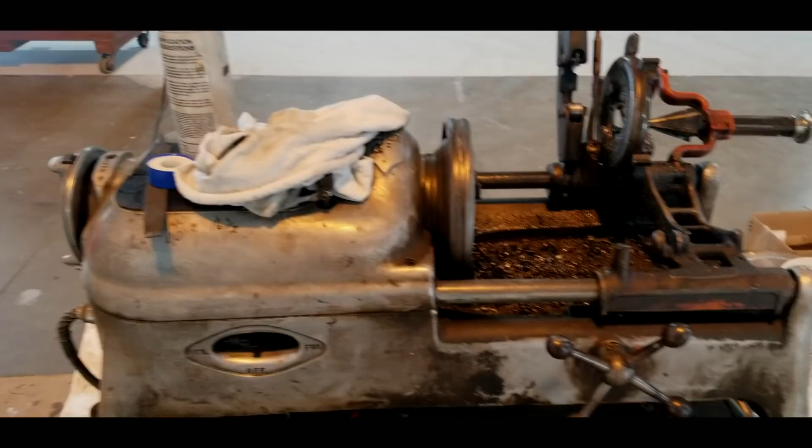Today we're doing some industrial airlines for a manufacturing plant. We're just getting set up here. Got my old Ridgid 535 out, and we burned through an awful lot of material. I'm going to walk you around and show you the airlines, what we did, and how we did it.

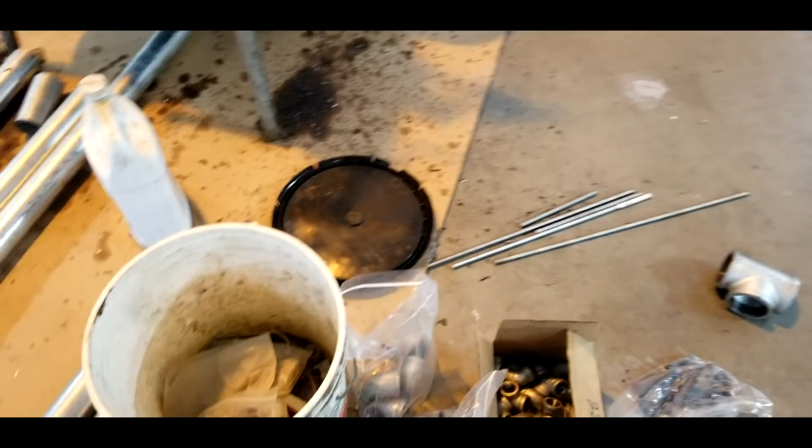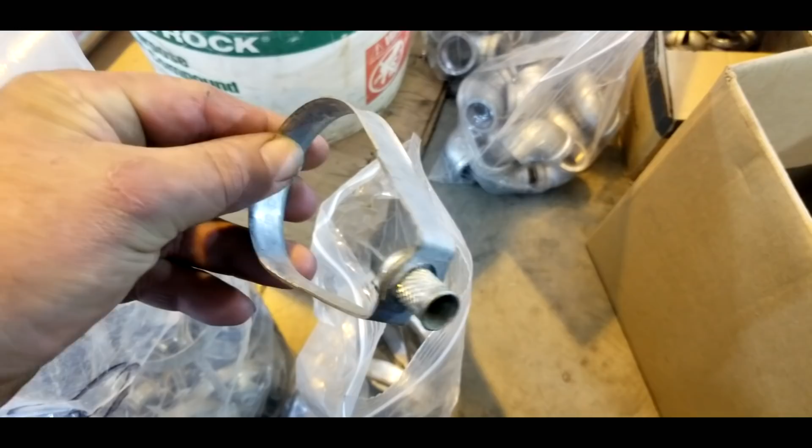Let's talk about the hangers, how we're hanging the pipe. We're hanging it on all thread, 3/8 all thread, and we're using what they call a band hanger down here in this bag. It's just called a band or a loop hanger. It's got a little threaded plug in there that threads into the all thread.

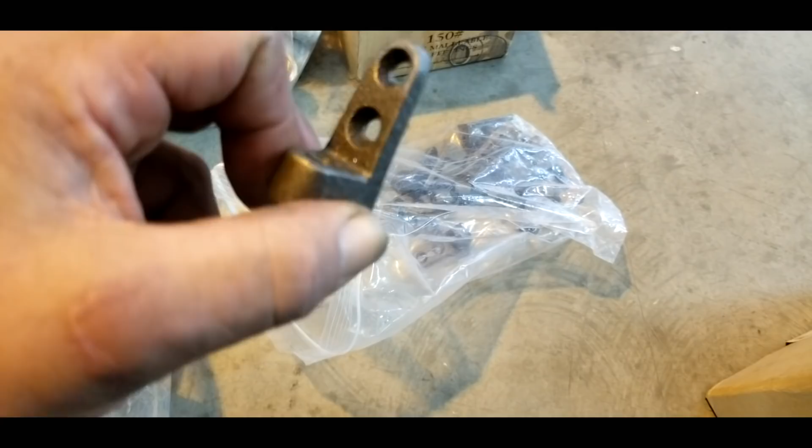Then we're using two attachment methods on the building. We've got some little cast iron angle clips that we screw into the purlins, and that's threaded for the all thread, so that's one way we do it. And that's a threaded lag that you can screw right into the purlin.

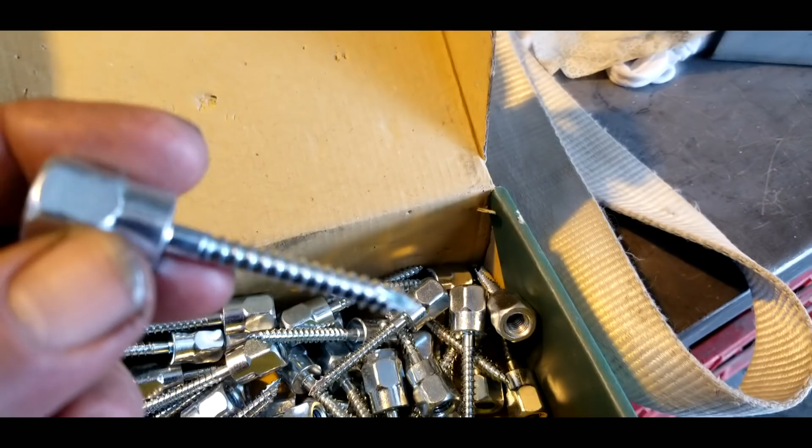It's got a 5/8 hex on it, and then it's got a 3/8 plug here in the back. You screw this up into the purlin and then put your all thread right in there. So that's how those are, our two different attachment methods.

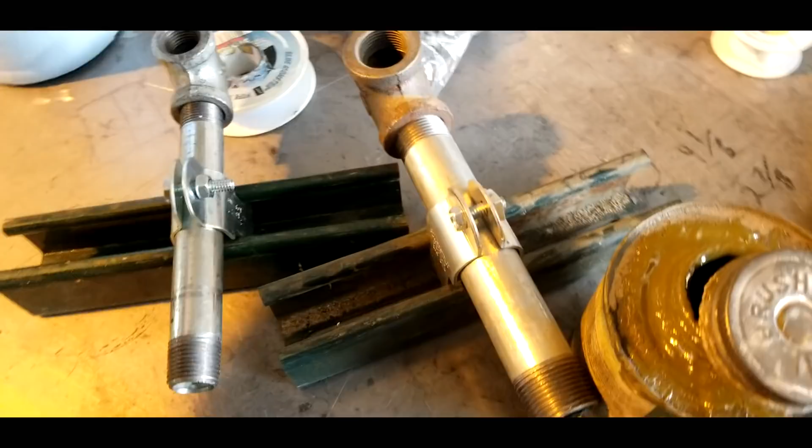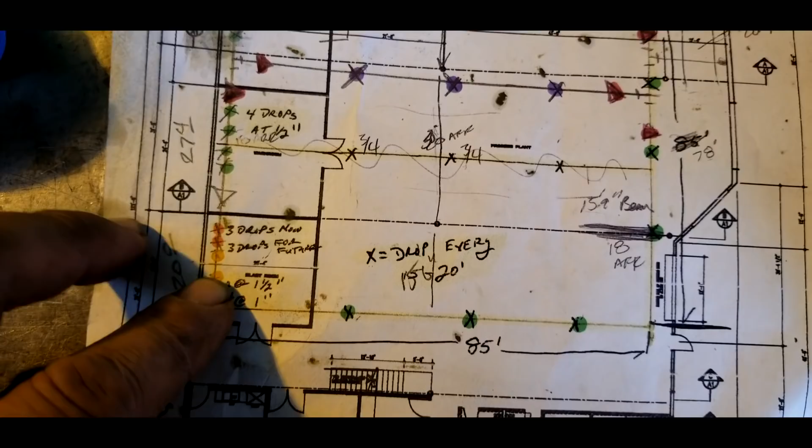Everywhere you see a pink dot is 1.5 inches, so there's more halves. The purples are 3/4, so we got some 3/4 in there. And everywhere you see one of these triangles are isolation valves for the main system.

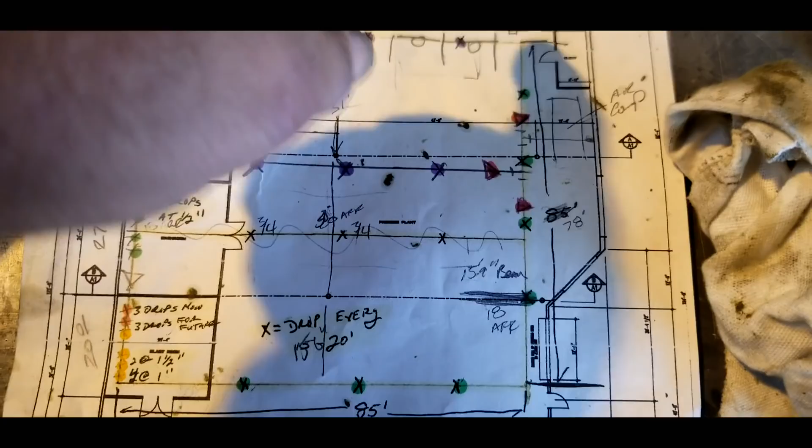The system is a loop. It does a big loop, plus it has a crossover in the middle. So anywhere over here in this crossover, we got valve, valve, valve, so we can isolate any section of the building.

Valve, valve, valve, and we can isolate any section of the building. So we can cut off this side of the loop, this side of the loop, or the center section of the loop, and work on it.

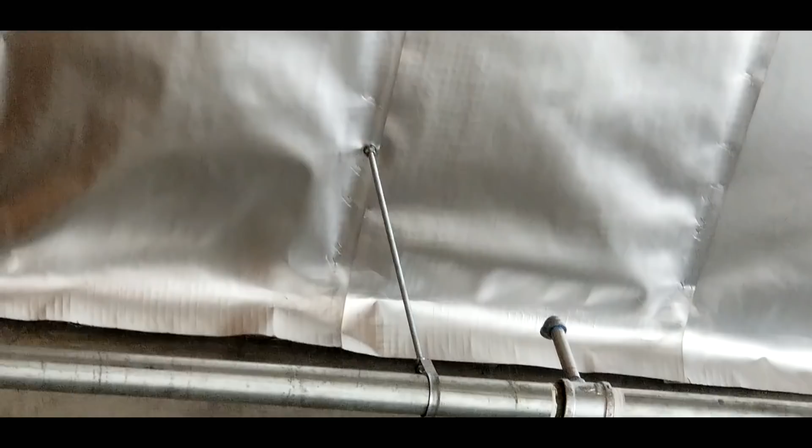So let's go take a look at the rest of the building. Okay, camera focused, and up there you'll see our attachment methods. I can actually zoom in on that a little bit and let you see that's a Sammy going into the bottom of a purlin with a piece of threaded rod coming down to a band hanger.

And that is a Schedule 40, 2-inch galvanized pipe. And if you'll notice, all my T's are facing up.

And I'll walk this line here. This is a paint mixing room that's going in underneath here. There's one of the big isolation valves, but we got a paint mixing room going in here.

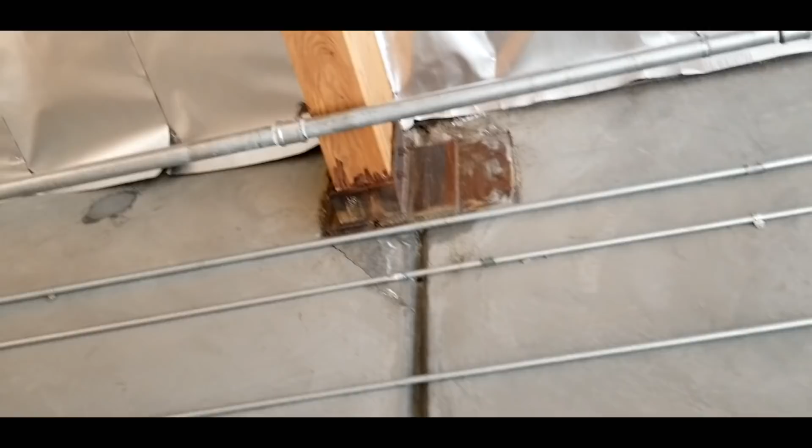And see, we just barely made it underneath that purlin there. And see, every one of these drops, I'm pointing them up.

And we're going to give you an overview of the system here in a little while. There's another isolation valve, more drops. And all these drops are going back to the walls.

I'm going to bring you back and show you what it looks like when we're all finished up. But all those air drops go over to the wall on Unistrut, and they're going to come down the wall, and there'll be a ball valve down low.

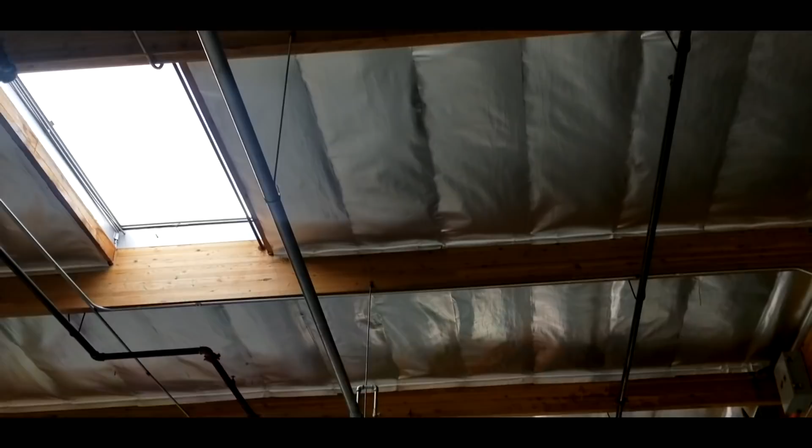All right, so we hook a turn here, and see, there's just a general purpose drop. We've got a valve already in, but we got a little gooseneck on each one, a 6-inch nipple facing up. Same thing there.

And we put an air outlet at every 21 feet, because that's what our pipe comes in, unless they specify any different.

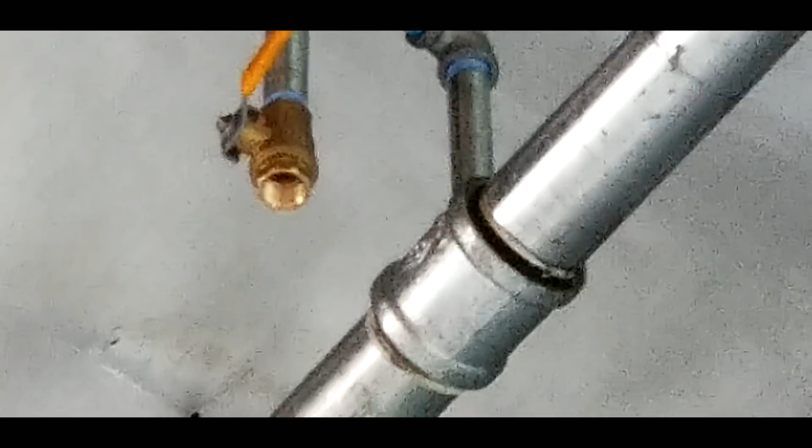There's another air drop there and another isolation valve. I'll zoom in real quick. So you see, we face all our T's up. This allows dirt and things like that to land in the main line, and they can't get out to the air drop if there's any debris in there.

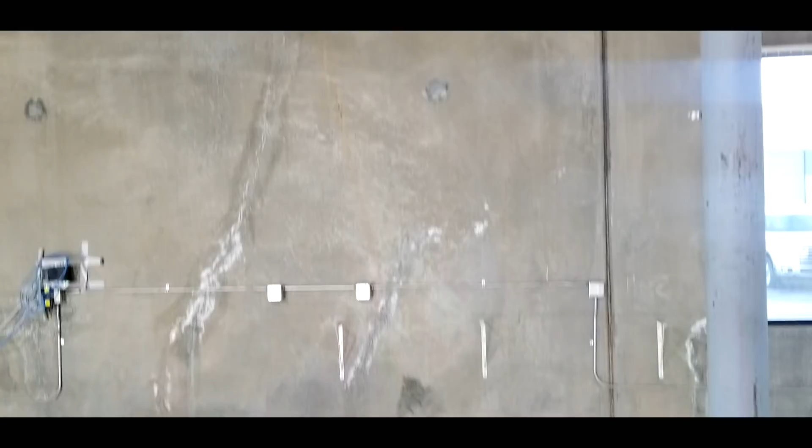Now, we've got one drop facing down. See right there? That's going to go over to this wall. And this is the location of the air compressors, so we're going to have an air compressor and a receiver tank over there in this area.

And we'll have a riser going up that wall, and then we're going to be coming across and feeding that one T that's facing down.

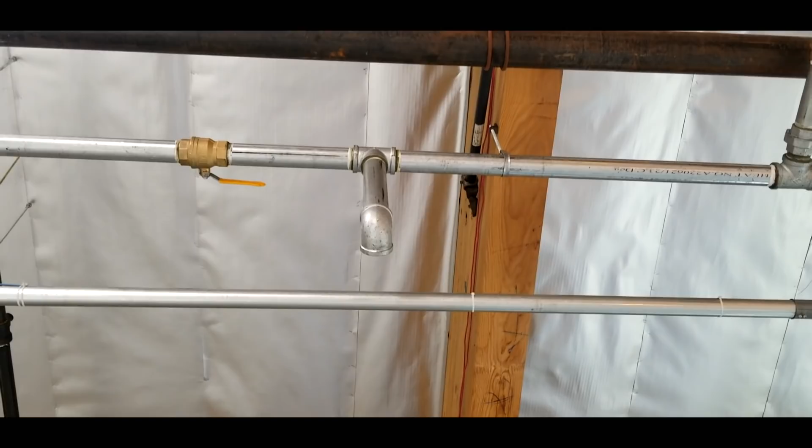And the entire system is pitched, and I'm going to do an overview of the whole thing here in a little bit. There's another isolation valve, and there's another isolation valve and another drop up there.

And this building was a mess when we came here. They got pipes running diagonally through the building, and then look at that mess over there. That looks horrible. This is a new tenant moving in here, but the old tenant just hacked this place. Nothing's straight, everything's crooked around here.

And then we've got some more drops down this wall. Same thing, T's facing up. But I'm going to back up here real quick and try to show you the whole building and explain what's happening here.

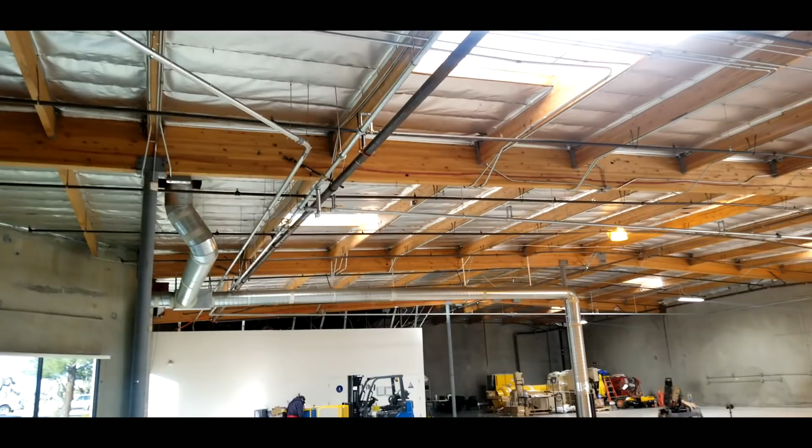Now what's happening is right here is where we're dropping in and going off to the wall for our air compressors. We've pitched our entire system. All the way along that back wall, that's running level. This line running down this wall, the line running down the center, and that far one way over there, those all pitch down as coming towards me right now. It's not much, we only pitched it 3 inches over about 85 feet, but it does drain this way.

So when we drain the house lines, everything comes back this direction, and we put a drip leg in to catch all the junk. It could be water, it could be oil if the compressor fails, it could be rust. It could be a number of things that can get into an airline. You'd be surprised what gets in there. But we just thought we'd show you our methods on how we install airlines and double loop systems.

We've got a very high demand way back here in this corner. There's sandblasting cabinets and things like that over there. So with the loop system and a crossover, we've got multiple paths back to the sandblast corner. And over here we've got a paint department where they'll be spraying with spray guns. And back in the paint mixing room, they're doing paint dispensing and pumping, so they'll have Graco pumps and lots of spraying going on. They need clean, dry air everywhere, sandblasting too. All right, let's go take a look at their air compressor.

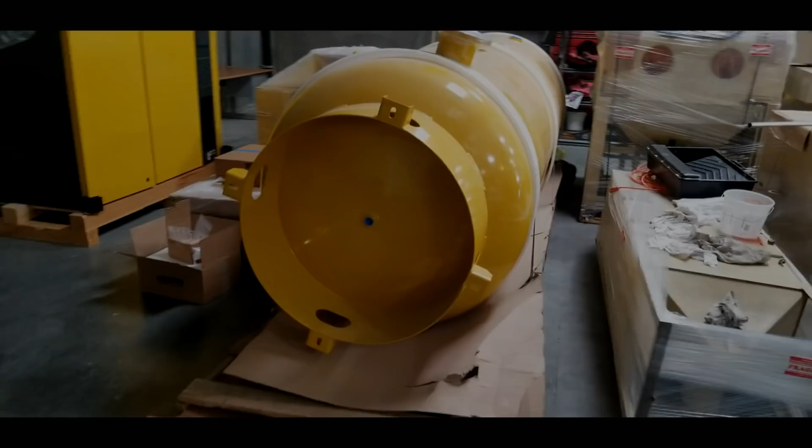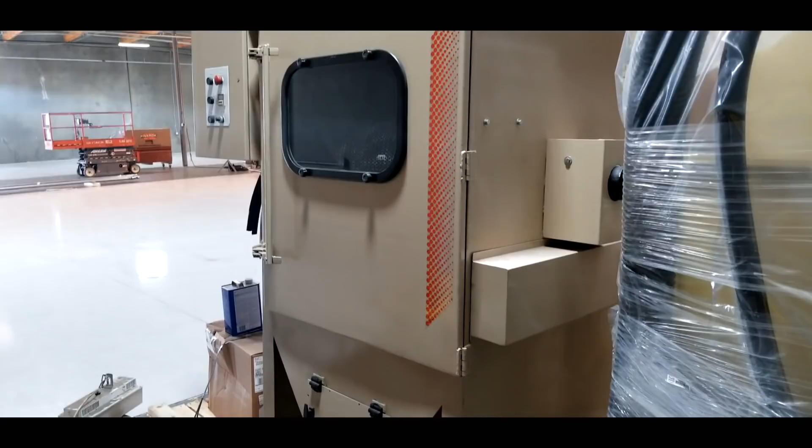So this thing's a monster. This is their receiver tank. It's laying down right now, but this is a vertical tank, and it's all from Kaeser. Nice stuff. That's the top of it. She's a big one. There's your sandblast cabinet, there's a blast cabinet, dust collector and hopper, elevator, blast pot. Nice little blast pot right there. And then their compressor, they got a really nice one.

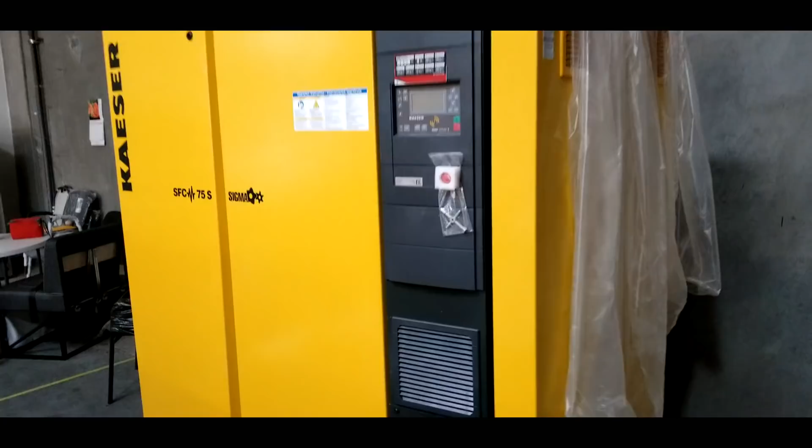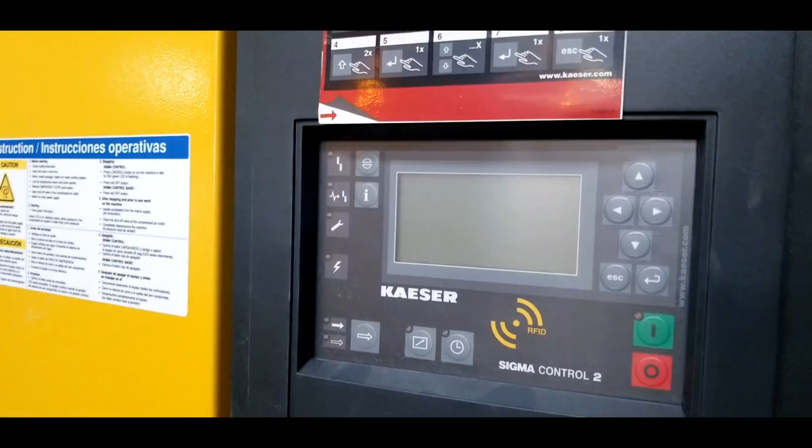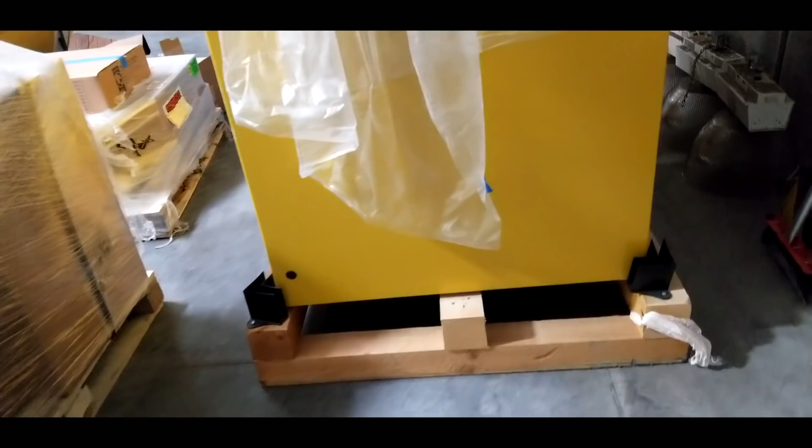They got the SFC 75. So this is a monster, and it's quiet — 68 decibels, if you can believe that, for this compressor. Nice touchscreen control panel, or not touchscreen, but a membrane pad. Nice, beautiful unit. And this has got the built-in refrigerated air dryer. There's one of the after coolers right here, a big radiator. So what a beautiful machine.

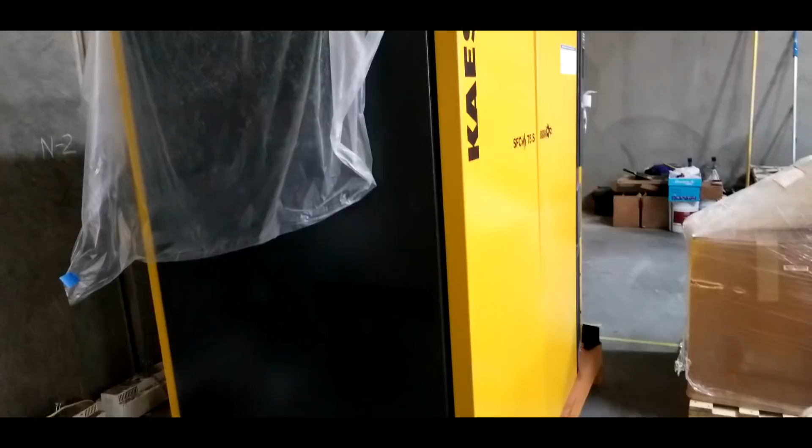Anyways, we'll get some video of this after it's installed. I'll let you guys see what this looks like after this is put in, and after our airdrops are put in, we'll do another video and show you what everything looks like installed. So I just thought I'd show you, this is day 3 for us. We've already got all those lines put in the building. But we'll bring you back after another couple days after we've got some drops in, and hopefully the compressor stuff's put in, and we can take a look at some of that too.

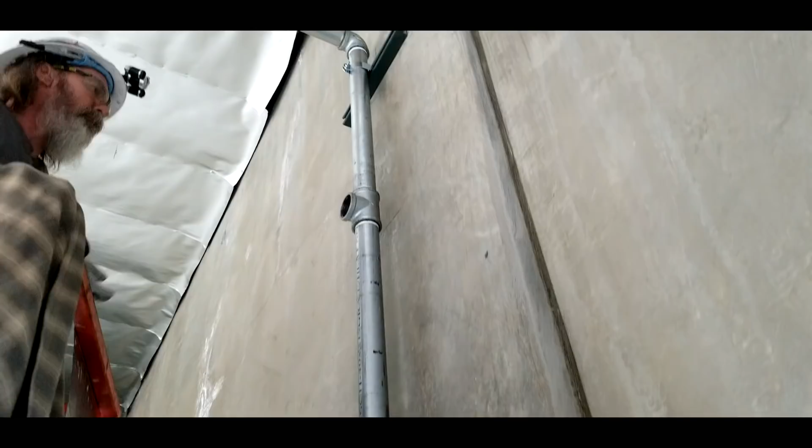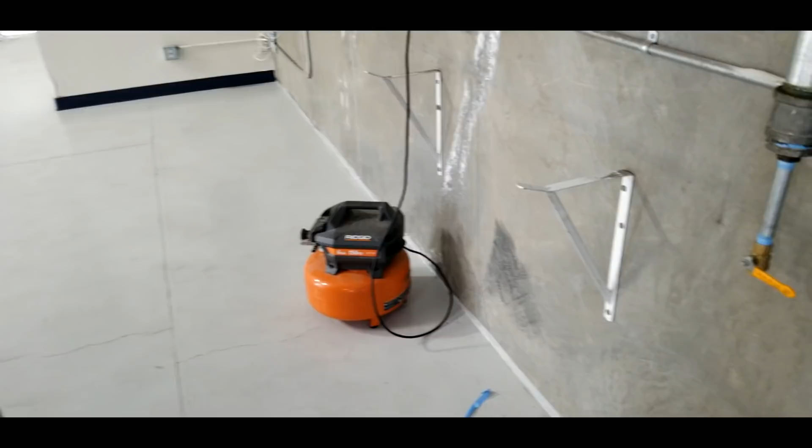All right, so we're just finishing up with the pressure test. All we did there was put a bushing in and a hose and hooked it up to a little pancake compressor and charged the line. It took a while, about an hour to bring this line up to 125 psi.

So this is where the new compressor is going to be going in. That receiver tank, that's the elevation of it, about 120 inches off the finished floor. And then we put a nice big drip leg in here, and that's going to be a drain for any junk or whatever. We've already got a little bit of junk out of there just from the little pancake compressor.

So for the rest of it, the only T in the entire building that's facing down is that one right there. And we've got isolation valves for the main loop system — there's a valve trio there, 3 valves on that T section, so we can cut off north side, middle, and south side of the building.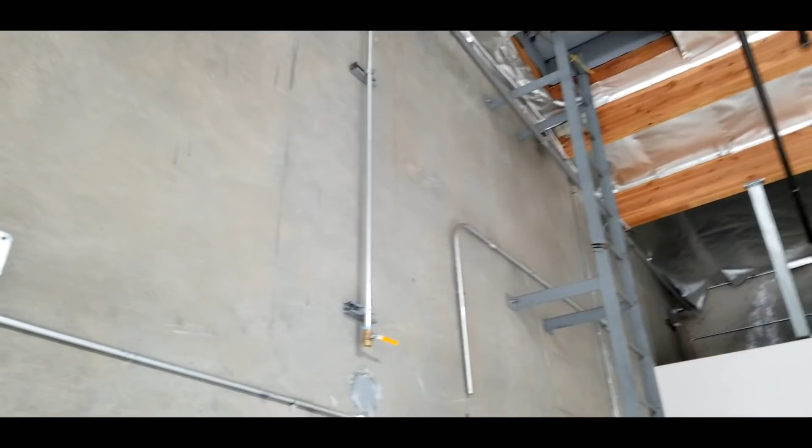And we put drops in just for general purpose, every pipe break. These drops are finished, they come down to a 9-foot elevation. There's some equipment going in that's going to be 8 foot tall, so with a little pipe nipple, you're up on top of the equipment. And that occurs in a few places.

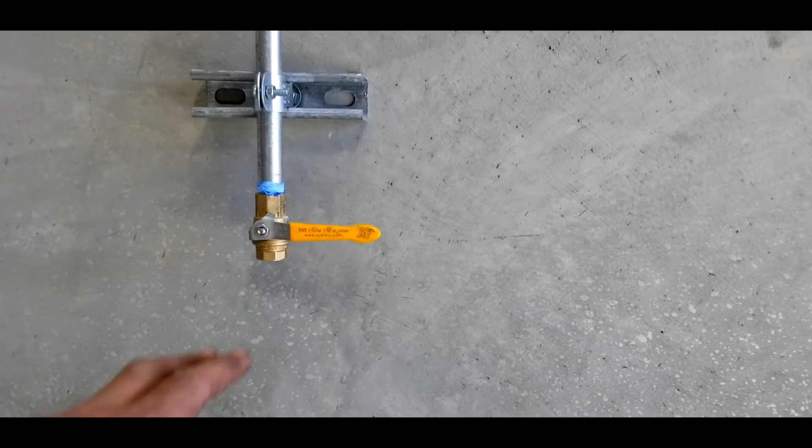Another one there. Okay, this is where they're building all their rooms. This is going to be a paint mixing room here. So we got 4 equally spaced down the wall. These are just at eye level, 5 foot off the finished floor. They'll probably come down, do some manifolding and some regulators and dryers and things like that inside the mixing room or paint kitchen — it's where they actually do their paint dispensing.

And then over here they've got a kind of wash tank room. This is where they're going to be doing some washing, so they'll have some acid tanks and stuff like that in there. And I think they need air for the agitators, so they've got 4 air connections in there.

And then another isolation valve, and that's going to isolate the sandblast room. So we've got some pretty big piping here. These are 1.5-inch drops here, so this is a pretty big dog here. And these are all 1 inch here in the center, and another 1.5 inches over here.

So this is another sandblast room. It doesn't matter what size pipe you run, you still do the up-and-over gooseneck riser trick up there.

All right, so what we've done is this side of the line is kind of the end of the line, and this run you're looking at right here is dead level. But when you go over to the other side of the building, at the far end, where the pipe enters the air compressor way over there by that orange bucket, it's 3 inches lower. The main line is put in at a slight slope.

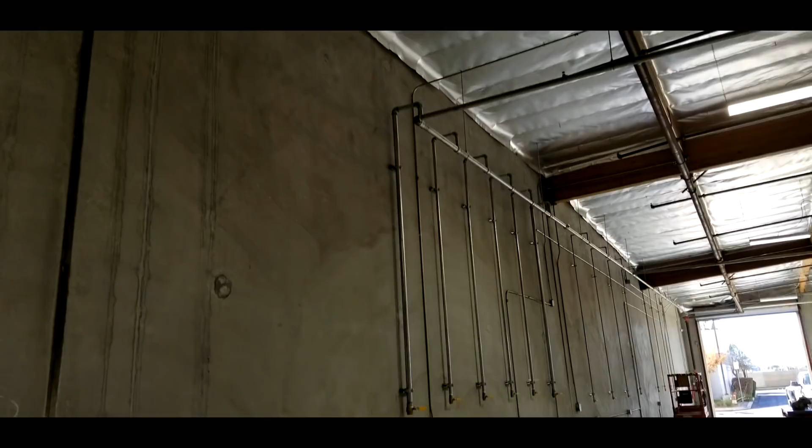So that's the reason for the oddly shaped piping, you know, the way the pipe pitches and the way we do the goosenecks. We put a little 6-inch riser in there and let each one do a gooseneck on the way down to the drop. Just keep any debris you have up in that main line and keep it from getting down into the drop and down to the point of use.

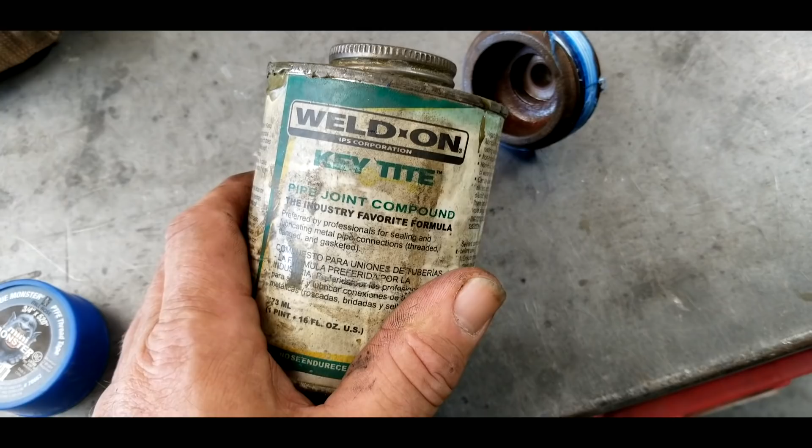And in case you're wondering how you make up the modern joints, I use just Teflon tape on anything 3/4 inch and smaller—3/4, 1/2 inch and smaller pipes, just tape. You don't need to use any pipe dope, okay? But the larger pipe sizes, it's tape and dope. So you use your T-tape, but also come in with a soft-set pipe dope.

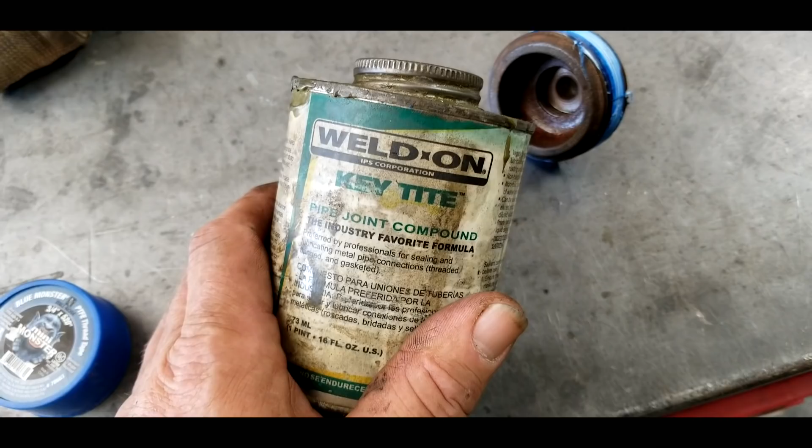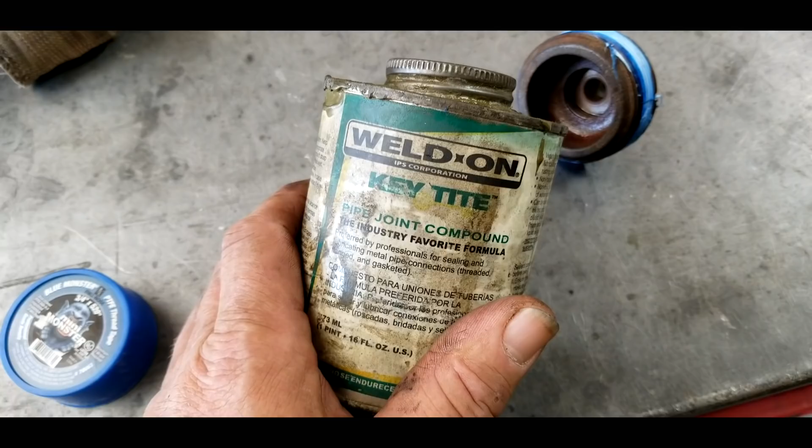So you tape your joint tightly, make sure it's devoid of oil and chips and things like that. Make sure your joint is cool—if you just got done threading it, let it cool down. Don't make up a hot joint, or your pipe will shrink up and you'll have a leak. So make sure you use tape first, put it down deep into the root of the thread, which means pulling the tape kind of tight. Get it down in the root of the thread, and then add the pipe dope on the leading edge of the pipe.

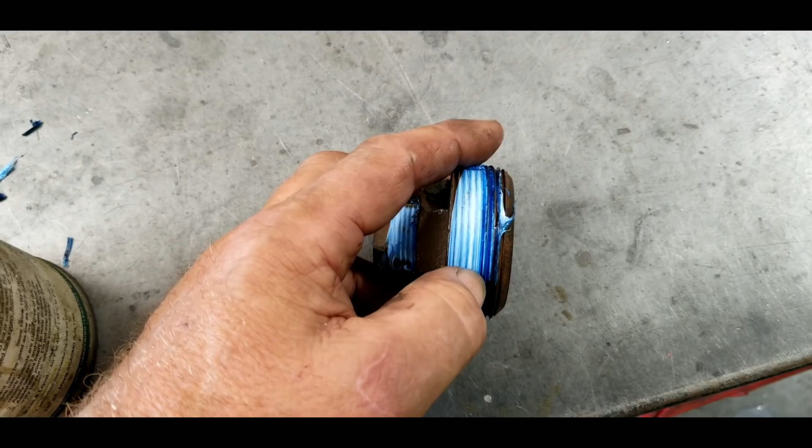When I say leading edge—about where the pipe tape is missing there—about the first 2 or 3 threads. You don't have to put it all the way up; that's just a waste of material, and it gets messy. And you can see the color of it, the stuff's nasty, it's like baby poop. But that's our method of sealing pipes.

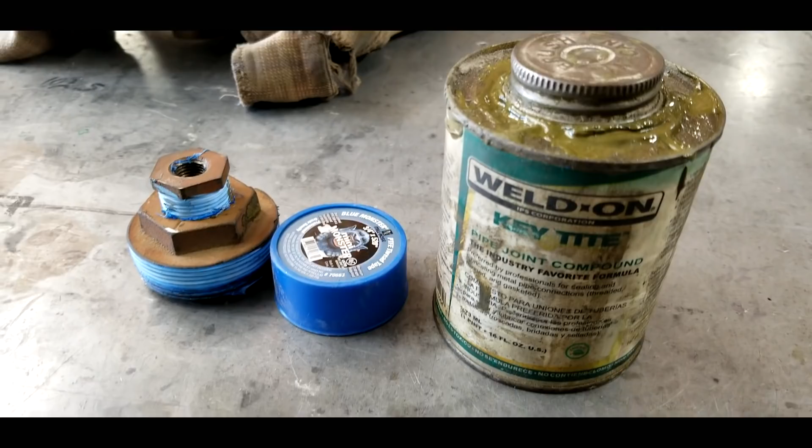If you're doing 1 inch, 1 1/4 inch, 1.5 or 2 inch, it's tape and dope. If you're doing 3/4 and below, tape only.

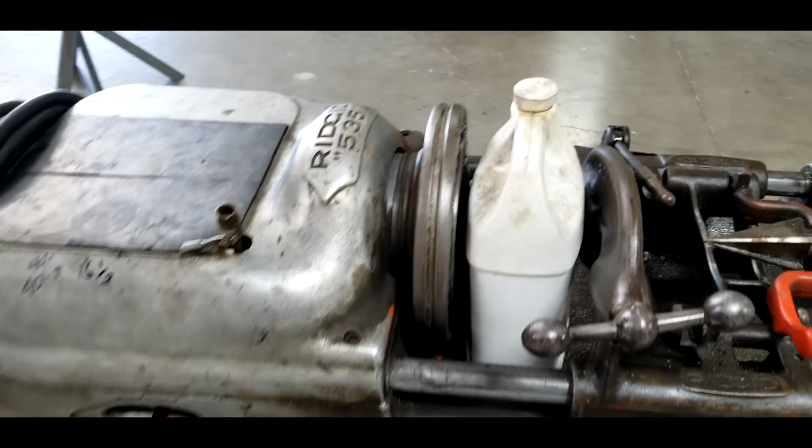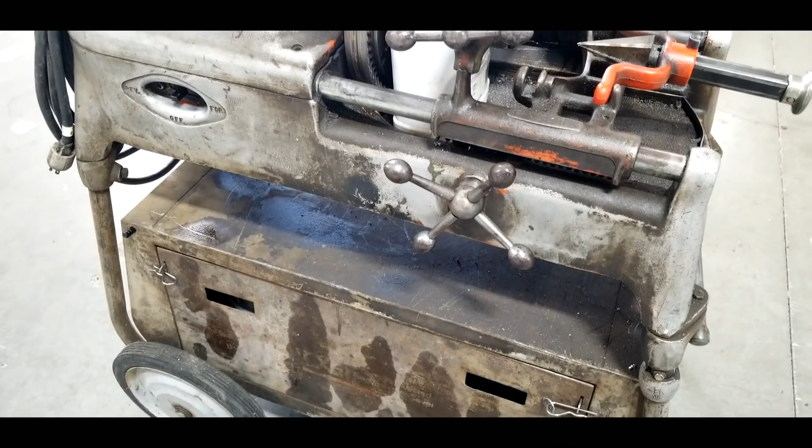Well, the old 535 sure earned its keep this time. We cut and threaded an awful lot of pipe. I've had this machine since the 80s, and we just call it the mule. This thing, I don't think it's ever going to die—great machine. I can't say enough good about it. I do believe they still make this machine, but that is the Ridgid 535, and that is my daily driver.

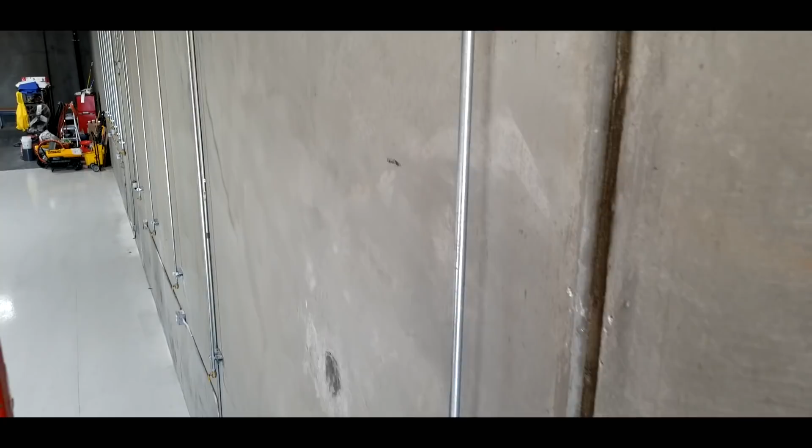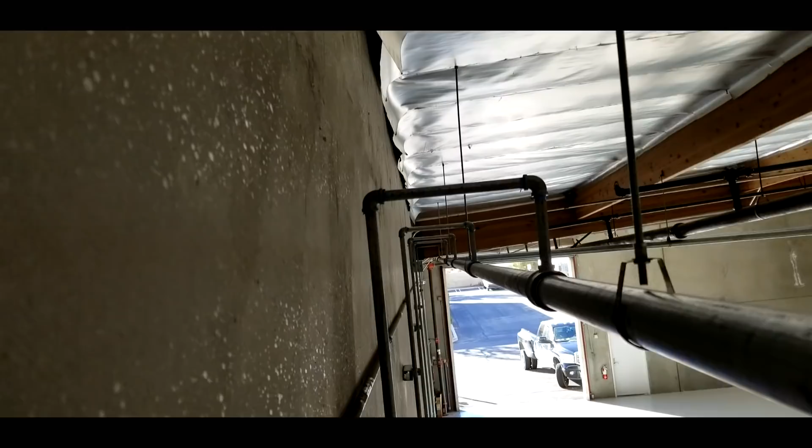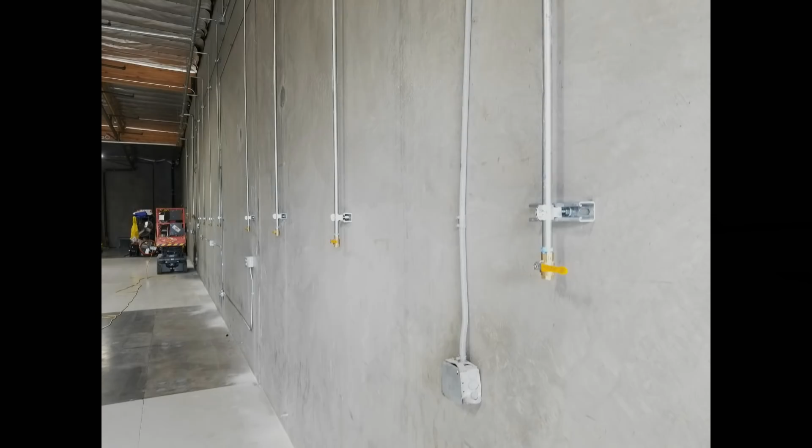Your choice of materials can be as simple as galvanized pipe like we did here. You can go a little more expensive with copper piping—that's always an option. Top of the heap is an aluminum powder-coated material; there are many different brands, Transair is one of them, Kaeser makes another one, but they're very expensive. Also, we never recommend plastic—it gets soft in the summertime when it's hot, and it's brittle when it's cold in the winter. So we never recommend plastic piping for your airline system.